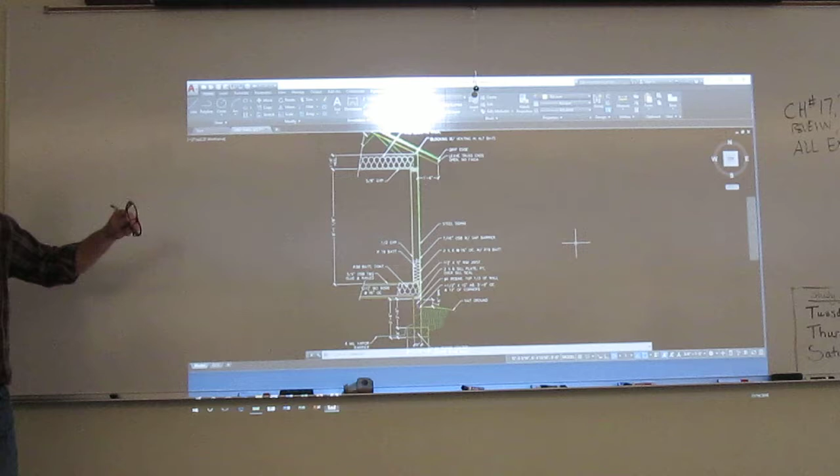Now, I gave you this file just because we need the height dimension. We're going to be drafting, or really drafting is not the right word for this. It's more like Xboxing, it's a video game. In many instances, people think that. But it's really a modeler. So we will be doing models.

And that's where the industry is really trying to go, is not have drafters, have modelers. Because if you can put together a 3D model of an object, we can have the computer generate the drafting for you. That's what we're really trying to get to.

So I draw a three-dimensional wall, and then I say, oh, I'm going to look at it from this direction. We don't draw the wall again, it projects the wall for us and gives us the view. AutoCAD will do that stuff too, and you'll find that out next semester. But that's in essence what the whole industry has been striving for, for 30 years. It's not quite there yet, but it's getting close.

You folks in your careers will see this. I'm pretty confident of it. How many of you heard in kindergarten, you must know the metric system? I heard it in kindergarten, or somewhere in there. Got to know it. Are we using the metric system here? No, we're not. So there's flat out lying to you.

For years and years, I would have said, do you need to know 3D? No, you don't. I don't say that anymore. I really think in the next 5 to 10 years, drafting is not really going to be a 2D arena.

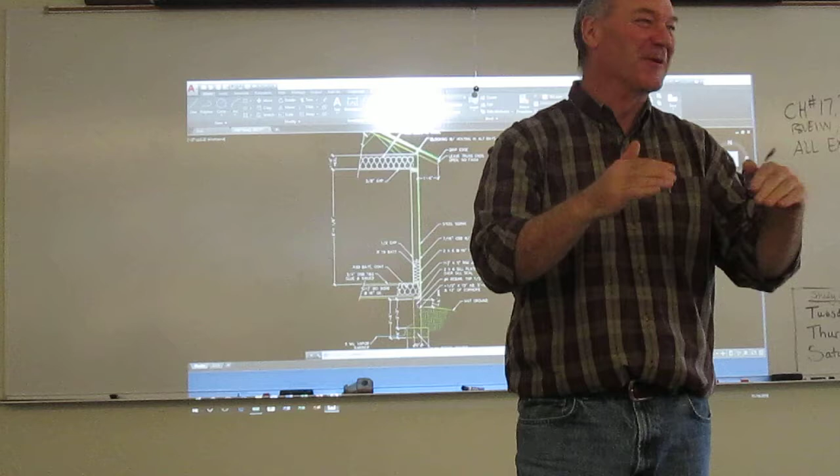But without a doubt, Twin Falls, 5 years ago, almost every firm in here was doing 3D drafting of some form or fashion. Okay. I think right now you would be hard pressed to go into any engineering or architectural office where 3D is not the first approach that we take on a project. Okay. So with that said, we got to get used to that. We need these height dimensions. We're not going to use this as a drawing, but we're going to base it on this.

Notice that the wall height from the finished floor on this drawing to the top of the wall is 8 foot 1 1/8. Okay, we're going to need that. So we've got the height of our wall. This is the height, by the way, of a framed wall. They're not done at 8 foot, they're not done at 9 foot, they're done at 8 foot 1 1/8 or 9 foot 1 1/8. Now the reason for that is we're going to put drywall on the top, we're going to put carpet or tile or something like that on the bottom, and that gives us 8 foot clear distance. That's why these walls are built to these weird dimensions.

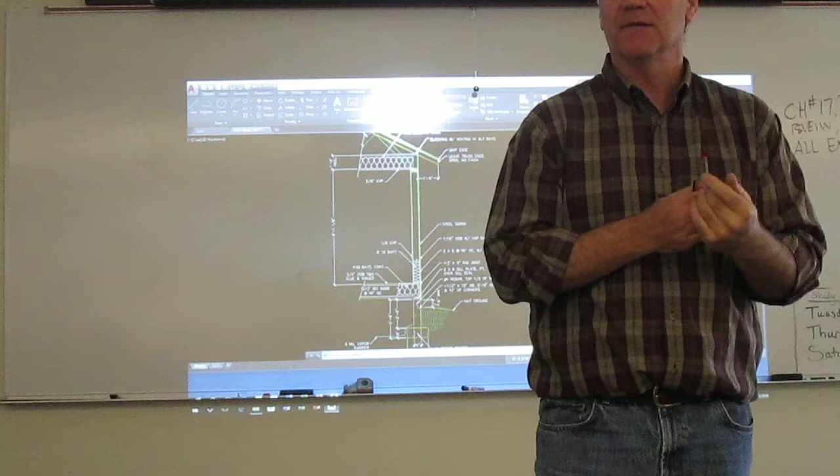Additionally, you see the exterior wall here, we're going to use a 2x6, and we are going to draw it as if there's nothing on the outside, because this is drawn for the framers. Okay. So when we draw that, we've got a 2x6, which is 5.5 inches wide, and you can measure that right on the drawing, and then it's got a 1/2 inch of drywall on the inside of it, so that's 6 inches. We're going to draw that wall at 6 inches wide.

Now when we go to draw an interior wall, it's generally a 2x4, which is 3.5 inches wide, and it has 1/2 inch sheetrock on both sides. So we'll draw it at 4.5 inches. We want them in the finished condition on the inside. That way when we put a hallway, which has to be 36 inches wide, we get that. Okay? Instead of having the studs at 36 and then we take an inch out of it, they red flag the job and you're done. You got to fix it. So there's a lot of different little nuances.

This is not going to be an architectural class. So if you're wondering about stuff, sure, I can field those questions. I'm fairly familiar with this, especially the residential end, and I can answer those questions. But that's really drafting 156, which we do in the spring. This is going to be a software session. So if you do have questions, feel free to ask them. I may push you off and say, go do some research here or here or whatever. So we're going to deal with that.

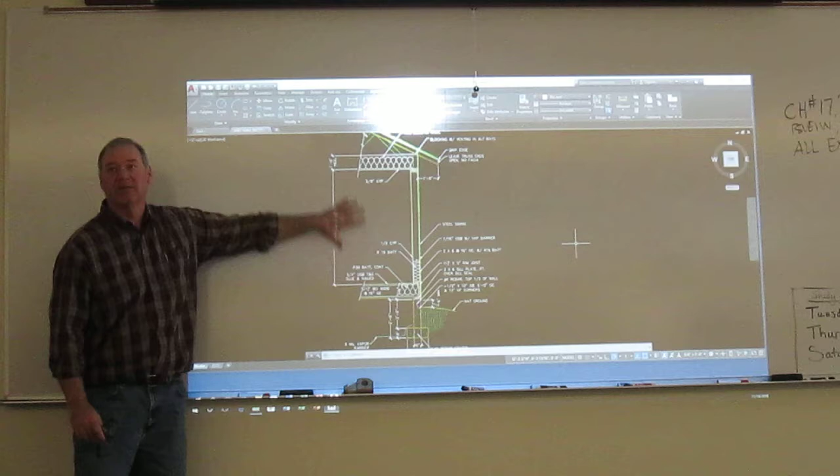So those are the two things we need right now. And I just wanted you to have this because we're going to base all of our heights off of this. Okay. So this is a removed section, right? What you're looking at here. Okay, so that's all I wanted to talk about there. You can just minimize that or close it. Let's open Revit and get to our open screen.

Now, we don't have enough time where we're only doing this an hour a week. How many weeks we got left? Like 3. So we're going to have like 4 sessions before the end of the semester. We're not going to learn this whole thing in those 4 weeks. If you want to learn this, I'm going to expect that you do a couple hours during the week outside of what we're doing. If you don't think you have the time for it, you need to stay up on class, pay attention to this hour. At least you're starting to get some of the knowledge and terminology. Don't do the work, but you're going to fall behind. Don't expect anything to be completed. We'll pick this up next semester also and do the first month of Revit before we switch to something else, and we'll probably go straight to Civil 3D at that point.

That we should be able to model most of this house in those 7, 8 days. Okay? So keep in mind we'll have that. Now, I will expect you to, like I said, keep going on the outside.

If you want to know more information about specific tools, I do have this text. It's a pretty all-inclusive text. It's for version 2018, which is almost identical to the 19. We keep it in this, what do you call that thing, a bookshelf? We keep it in that over there. If you use it, please take it to your desk, use it, put it back when you're done so another student has access to it.

A floor plan, when you look at it, and I'm sure most of you have seen these things. So this sheet that I gave you, here's a floor plan. This is a top view, that's a full section. Okay, just so you know where the view happens.

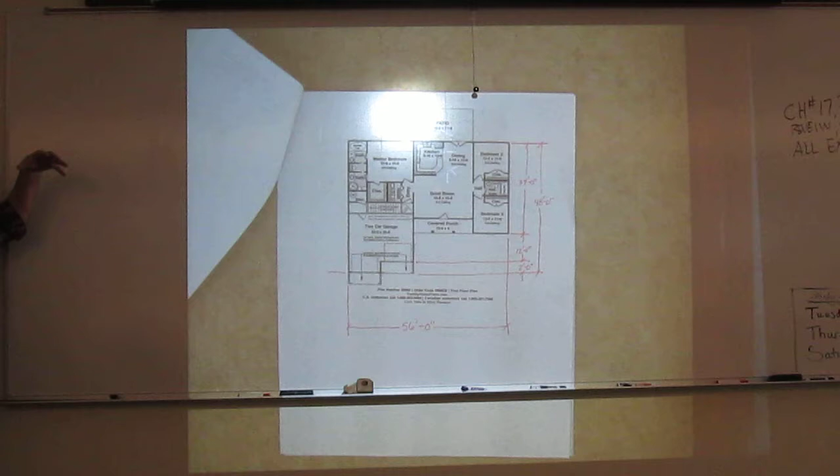When we look at a floor plan, what we've done is we've taken a wall and cut it 4 feet high. Okay, so you come out here, you measure up 4 feet, and we're going to cut this wall off and throw the ceiling and everything away, and we're looking down on the structure. So this is a full section taken 4 foot off the floor.

The reason we take it 4 feet off the floor is it gets us above cabinets, and it makes sure we intersect the windows and all the doors so we can display them. That's why this cut is taken at this part. So when you see a floor plan, full section, 4 foot off the floor. Okay, that's what we're going to start drawing today.

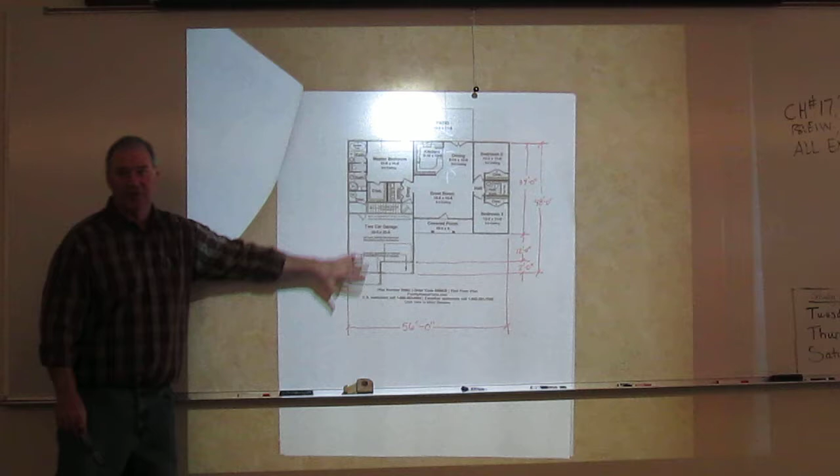Now you do have some other views that are given to you. The front one right here, this is your front view, and it's a multi-view. True size and shape, looking at the front of the object. So the floor plan's a top view, this is a front view.

If you turn a couple pages, you're going to see a rear elevation, and that's just a rear view on multi-view. Okay. So keep in mind, everything we're talking about, this glass box, it's still sitting around this house. We've still got a glass box, we're still doing multi-view.

Now, one other thing before I jump into running this program. Revit, ArchiCAD, AutoCAD Architecture. I could go on and on. There's many of these. These are all three-dimensional architectural programs. They're meant for the architectural world.

Okay, if I'm doing a widget like we're drawing now, I'm not using Revit. I'm using something else like AutoCAD. So keep in mind, this is meant for the architectural world. All of these have one thing in common. They are what we call BIMs. And this is really where the industry's going. This stands for Building Information Model. You're going to hear this term a lot.